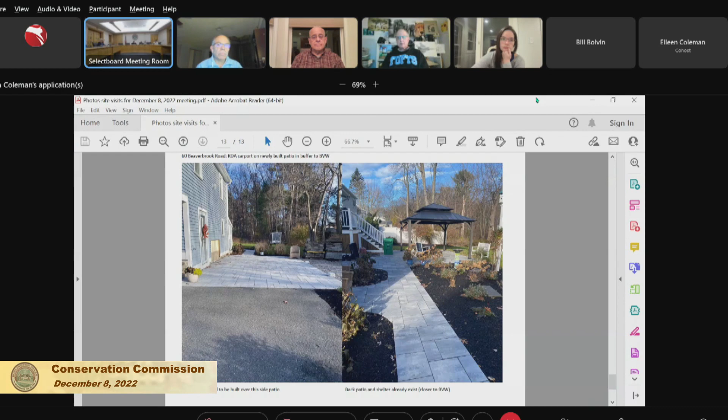None at all. Dawn, no, no questions. Kent, anything? Indra, anything? Nope. Bill? No questions. I have no questions. Is there anybody in the audience that has a comment for 60 Beaverbrook Road, either online or in person? The answer is no.

All right, so we have a small draft decision, which simply means if they adhere to a few short conditions, then this project has no impact on the resource area. So the findings are that the applicant proposed to build a 24-foot by 18-foot carport over a patio on the eastern side of the existing house. The work was located within the 100-foot buffer zone of a bordering vegetated wetland and would be about 80 feet from the wetland. The owner had already built a patio at this location prior to the carport.

There are a few minor conditions on this, which are mostly just saying that the sediment barriers from last year's project are still in place, so she doesn't actually have to put up any more erosion controls. Department staff may require erosion controls to be enhanced if deemed insufficient, and she just has to keep an eye on no tracking of sediments onto the roadway. No filling or grading on the property is allowed beyond what's shown in the plan. And she's also aware from last year that she should not dump anything into the wetlands and should not be using pesticides, herbicides, or fungicides on her property.

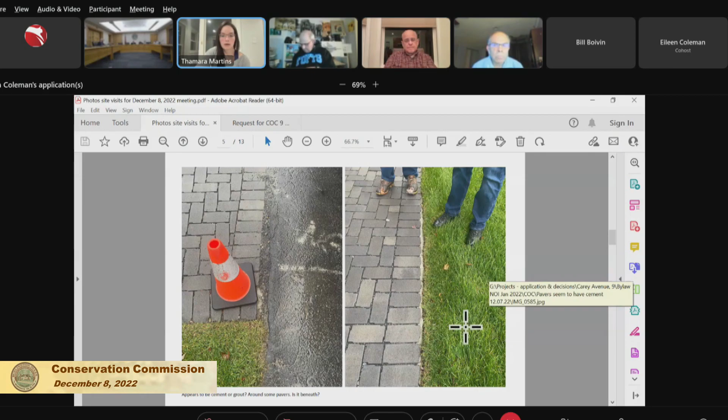I think that's mainly from where the engineer tested the pavers when he wrote the report, so to replace the pavers where he had tested, that's what we did — replaced it on the side only. It's only on the side, the edge. So it's only on the edge. Yeah, only at that edge. Everything else was prepared only using gravel, and the pavers were nicely placed. That was just on that side. Okay, all right, that's fine. It's very attractive too.

Let's see if anyone else has anything on this one. Ed, any further comment? No, she pretty much covered what concern I had. Don? No further questions. Indra? Nope. Kent? Nope. Bill? No. I have nothing further. All right, so could I have a motion for the commission to issue the certificate of compliance for 9 Carey Ave?

Is there a motion? So moved. Okay, I guess Don gets the first one. Who's seconding? I'll do second. And Bill did the second. All right, so Ed, how do you vote? Yes. Don, how do you vote? Yes. Indra, how do you vote? Yes. Kent? Yes. Bill? Yes. And the chair votes yes, by a vote of six to zero. The certificate of compliance is issued.

Next is the performance surety. How much is it? It was for 2,500. All right, do you recommend full release or partial hold or what? I think under the circumstances it might be wise to hold maybe half of it, to make sure we, or somebody, can cover the replacement of some of the wetland plants if they don't do well. They spent a lot of money on those wetland plants, so I know they're going to want them to succeed.

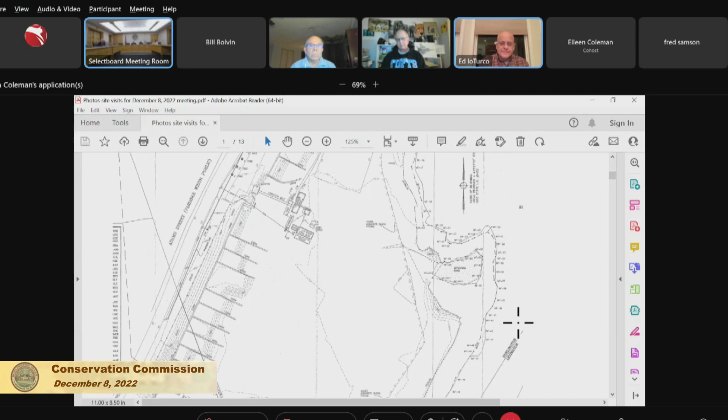Right, okay. Pretty sure Dawn, that is there, isn't it? I have a question regarding what was discharged into the Vine Brook by the concrete plant. Is there documentation on what the material was?

It was just water - the ponds used to be used to wash gravel, so they would run water through the ponds over stone. If there was excess water that approached the height of the pond, it would flow out into the Vine Brook. It was monitored by the EPA, and there was a NPDES permit in place for it. When we eliminated the pond, we were able to eliminate the permit as well. So there is currently no discharge other than overland flow, like any other site in town. There's no point source discharge anymore.

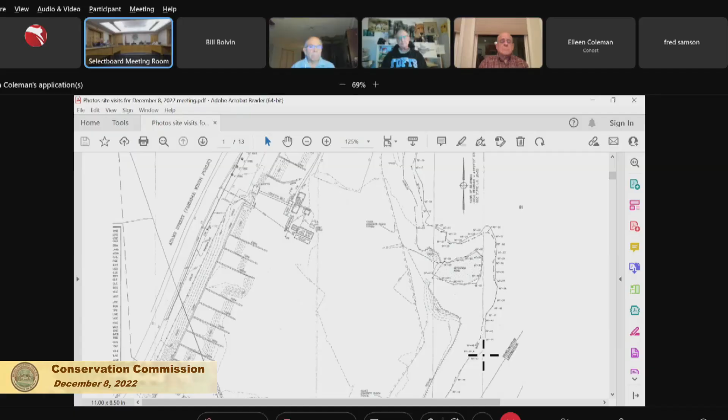Okay, thank you. Kent? Everybody's covered. Okay. Bill?

The pond that is no longer there, is that shown as retention pond on the drawing? Is that now plants or? It's completely grassed over now. You can see aerials. I'm not sure if he was able to, but I do have some. I can show you what it looks like now. I'm just curious if that was it, if that was a location on the drawing.

This is 2000. You have the aerials on here too. Yeah, I put them into a single one. For this, on the screen, I'm going to also show them. Okay, this is basically the footprint of the pond and it's grassed over now. You can see how it used to have a constraint there - they didn't really change the topography, they just abandoned it.

So where is that retention area now, the water area that we saw in this? This was the pond, now it's grass. No, on the drawing there's something that says retention pond, and I'm just curious, is that what that is? But it seems to be a different shape than what you've done. There is something on the drawing there, yeah. Oh, I think it's just a grassed area now. I mean, it was probably just a holding pond.

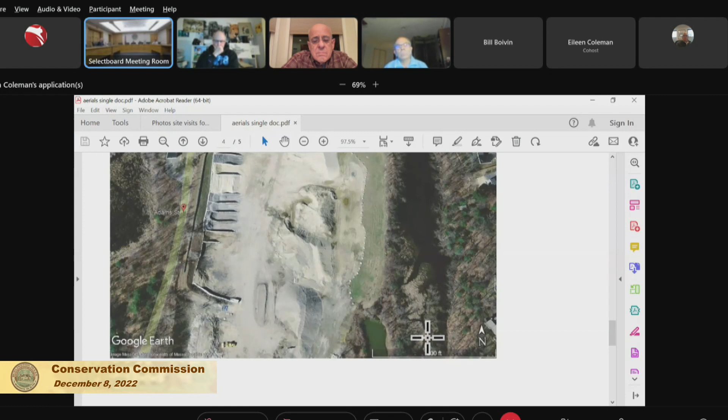I think it might be - is it what I'm showing you right there? It was probably deeper at that point, which is 2008, maybe it's just the shallow remnants, perhaps. Yeah, it looked like some kind of a wetland pond-ish type of thing, like a marsh - I would call it more a marsh than a pond at this point. It was standing water, there was standing water in there. Okay.

Okay, all right, Bill? I would prefer to see that area just left alone as well, instead of mowed. My comments are, it's inside those concrete blocks, the inner riparian, I thought I heard you say. That is the most important part of the 200-foot buffer zone.

It acts - if it's vegetated properly, it would act for wildlife, for the adjacent pond on the other side, and acts for various reasons of the values for riverfront. But if it's completely mowed, it doesn't have that potential. So, yeah, I think it still has to be - the only question is, it's all grass. Will it revegetate appropriately, with all the grass that's there now?

Yeah, it's a wildlife seed mix that was out there. It's not a long grass type of grass. Like I have seen it when they haven't cut it regularly, and it does grow to be more like a meadow type vegetation - it's not grass that only stays this tall. And as you move further towards Lexington on the site, the vegetation becomes more mixed with wetland herbs where it's wetter. Do you know that it's a more diverse plant community?

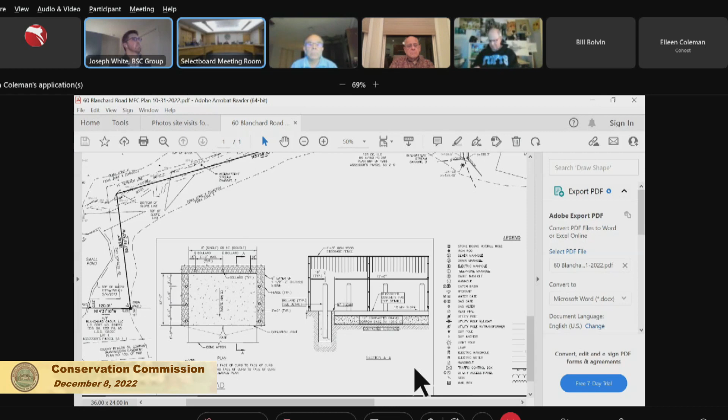Bill? No problem. One question: is the existing wood fence that delineates the end of the parking lot on the corner being taken down, or is the enclosure inside that woodish type of fence? Are you talking about the guardrail there? Yes, a wood guardrail. I believe that's staying, we're not proposing to take that down. That's already established, and it would just require more disturbance right up against the 20-foot there, so I don't see why that can't stay. That's why I asked, because there would be more disturbance.

Okay, all right, so I guess there's nothing further on this. Then I guess we could have a motion to issue the minor engineering change for 60 Blanchard Road to add a dumpster with an enclosure for permit DEP file number 129-652.

So moved, Bill. Second, Indra. Ed, how do you vote? Yes. Don, yes. Indra, yes. Kent, yes. Bill, yes. And the chair votes yes. The minor engineering change for 60 Blanchard Road is approved.

Okay, thank you everybody. Have a good night. You too. Have a good night, thank you.

Next, we're on item number 8, notices given. The commission will hold a public hearing. As a courtesy to the public, the meeting will be accessible virtually through Zoom. The public hearing is to take all information related to a notice of intent filed by Robert and Karen Bonanno for the installation of electric conduit, culvert repair, and wall construction, located at 214 Winn Street. The proposed work would be within the bordering vegetative wetland and stream bank, and is associated with a 100-foot buffer zone. It's under the State Wetlands Protection Act, and also under Burlington Bylaw Article 14. The commission will review the information relative to the application and may issue an order of conditions and a Burlington Wetlands permit for this project. The application may be viewed at the link on the Conservation Commission webpage.

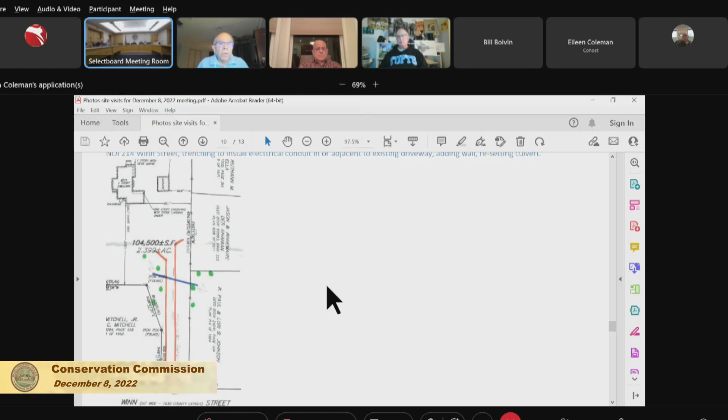All right, Don, anything? No, nothing else. Indra, nothing further. Kent, anything? John covered everything? Bill? Nope.

One last question. Are you pulling out the wires on telephone poles or something? Are you gonna pull out the telephone poles? I'm gonna make the necessary phone calls to see, I'd like to get the poles removed altogether if that was possible, I'm not in construction. I think you are in construction. Yeah, okay. So would that cause a lot of disturbance? If that ends up being a problem, we can discuss that once I find out the process of removing the poles. If they say to cut them versus removing them, we're fine with that as well.

If you think there's gonna be a disturbance, you should contact the office. I would assume they're fairly deep in the ground, and if it becomes an issue, if they can slice them and that's okay with you guys, I would leave them. Yeah, oh yeah, that's fine. We're interested in the least disturbance for natural resources and stuff, so. Bird house on top of it. Okay, so that was my only question.

I was wondering about the telephone poles. I'm sure it would be invasive, so I'm assuming we may take the path of cutting them if they allow that. Right, yeah, that's fine. Okay. And the DEP did issue a file number on this, 122-684.

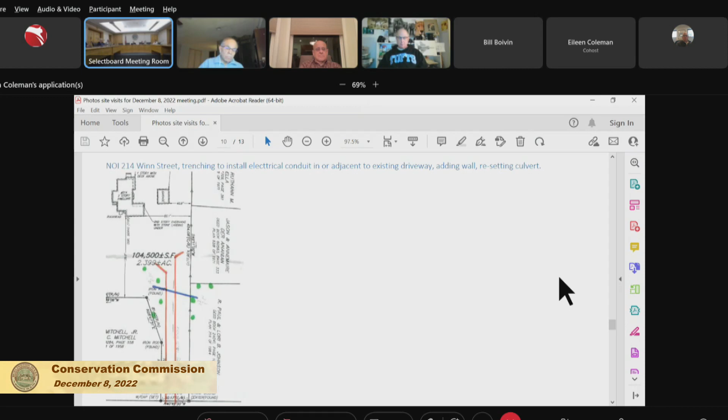All right, so I have to ask, for a public hearing, it's entitled to public comment. Is there anyone here that would like to make a comment about the proposed project to do some work on an existing driveway at 214 Winn Street? Anyone? Looks like no. Okay, that's good.

All right, then. So we would close it the next time? So it sounded like there weren't any issues at all that you'll have to respond to. So it looks to me like we simply close the hearing and issue the permit at the next meeting.

Thank you. Well, they'll need to provide some more detail and a better drawing, and Mary will maybe tweak the other one, there's a little bit more in the drawing. Yeah, well, we can talk about that. We'll find out the length of the culvert that goes across, because we want to replace it in kind, and that will give us the square footage of alteration. And we'll draw something up about the cobblestones, just to show that it's a decorative edge as opposed to a wall. Sounds great. Okay, so could I have a motion then to continue this public hearing until the next meeting of January 12th?

12th. So moved, Ed? Second, Bill. All right, Ed, how do you vote? Yes? John? Yes. Indra? Yes. Kent? Yes. Bill? Yes. And the chair votes yes. By a vote of six to zero, the hearing for 214 Winn Street is continued to January

12th, and we'll wrap it up at that time. Thank you so much. It's close to Christmas that date, so that's probably when you're going to get your gift. It's better than a washer and dryer. If we have to. Thanks for coming in person.

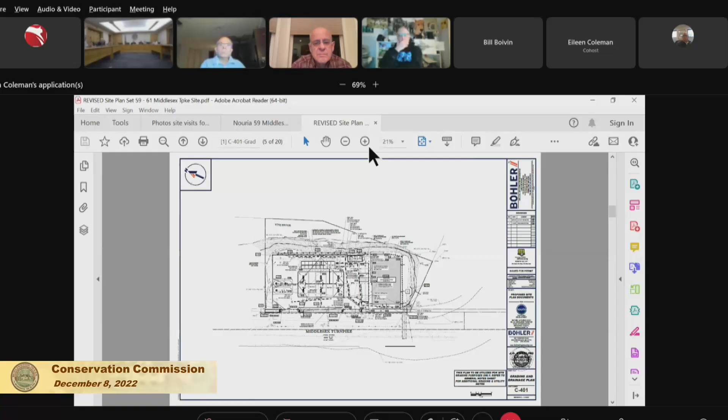To address these requests, we reconfigured the stormwater system to route parking lot runoff to the infiltration basin instead of having only roof runoff directed there as previously proposed. We also more than tripled the storage volume of the infiltration basin, resulting in reductions of peak flow rates and volumes of 50 to nearly 70% over existing conditions. Also, as requested, we've specified there will be no gap between the bottom of the new vinyl fence and the ground. There was a similar request from Mr. Keelig, and we addressed that regarding the patio area by fully enclosing it to the south, so no trash will go through there. There was a gap there previously, so that's been fixed as well. That's pretty much what we've done since last time. I think we've addressed your requests, but I'm happy to answer any questions or provide more detail.

All right, John or Eileen, anything further on this?

Sure. So, as you recall, the original plan was to infiltrate the rooftop from the building and the canopies over the gas station, over the gas tanks, gas pumps, and the driveway was going to just go off into the wetland to the south via swale. They've redone it so that all the paved area goes into the infiltration system. Now, roughly half the building goes into it, so I have one question: was it just a capacity issue? The back half of the building you don't have going into the infiltration system anymore, and initially you did. Was it just too much volume? Well, partially, yeah. We didn't need to infiltrate that as much since we had the remainder. We added so much area going to the infiltration basin. Plus, practically speaking, it's just easier, the roof's already right there to the rear, and it doesn't need to be treated, so we felt we should just put it there. It's a big increase in infiltration over existing conditions, and also additionally over what was approved the first time and what they submitted initially with this filing. The initial filing had modest reductions in peak rates for the 2-year and 100-year storms. Now this revised plan has a substantial decrease in peak rates for the storms. So I would say this is definitely a big improvement.

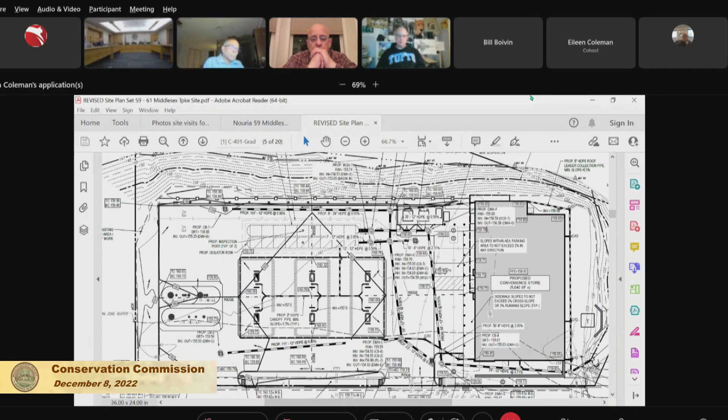Okay, so this is a public hearing. Is there anyone in the audience who would like to make a comment for 59 and 61 Middlesex Turnpike by Nouria Energy Corporation, to demolish the existing facilities - gas station, convenience store, restaurant - and basically construct a new one? Nope. Okay, so the record should show there was no public participation for this particular hearing.

All right, so we have draft decisions. We do, and I shared them with the applicant earlier today, and Andy gave me a couple of edits, so I'm going to read out the one that had his green change, so that we can make sure we're all on the same page with that.

Starting with the bylaw decision: a notice of intent was filed for the demolition of 2 structures and construction of the gas station and convenience store within the 100-foot buffer zone to bordering vegetated wetlands and within riverfront area to Vinebrook. Then we go through the filing history, and I just need to remove an extra period there - a long list of plans and various things that they have shared with us.

So, wetland values and areas subject to protection: the proposed work was within the 100-foot buffer zone to bordering vegetated wetlands and within the inner 100-foot riverfront area to Vinebrook. He made a change here - I had said that the closest point of the proposed work was 19 feet, 19 or 18, yeah. He changed it to the closest point is 11 feet from the BVW, and the closest existing building was 19.2 feet from the stream.

Work occurring within or close proximity to the resource areas can generate adverse impacts to those areas. We put a lot of figures here about how much of the square feet of the project site was in the riverfront area. This is yellow because we basically used the same exact decisions that we had used in the previous iteration - we just changed the appropriate things. So in this case, it's a total of 26,055 square feet. The Commission is finding that there are no practicable and substantially equivalent economic alternatives with less impact.

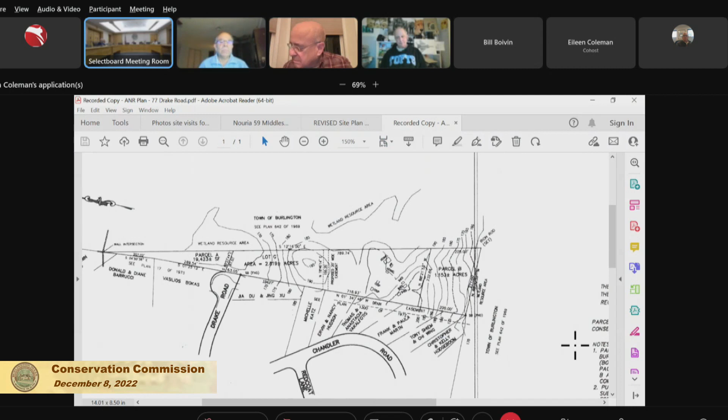Fantastic, done and dusted. Could I have a motion to accept 2 land donations, 2 parcels of land on Drake Road, from Gary Litchfield, being given to the town, which is pretty much adjacent to the existing Mill Pond Conservation Area, amounting to 1.5 acres.

Is there a motion to that effect? So moved, Indra. Second, Don. Ed, how do you vote? Yes. Don? Yes. Indra, yes. Kent, yes. Bill, yes. And the chair votes yes, by a vote of 6-0. The commission enthusiastically accepts these two donations of land.

Next, we have 10B, to vote the 2023 meeting schedule. This is the list of dates. Does anyone have any comments?

I will be out on the 12th, unless a quorum is needed, and I'll participate from a hotel room if it has adequate web connection, but I'd prefer not to if it's not necessary. I'll be actually out of country.

I can do that meeting if you need me. Maybe we might need your effective date adjusted, don't submit your formal resignation yet. We won't have a quorum otherwise. Could we count on you, Don, for the 12th? Yeah, I'll be here. Prolong the agony or the pleasure? I don't know how you view it.